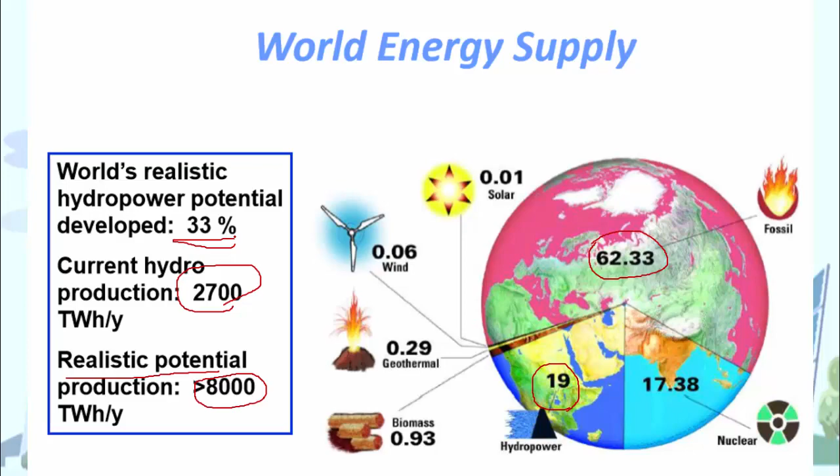Another interesting statistic here is the total realistic power potential production is around more than 8,000 terawatt hours per year. But currently we are producing only 2,700 terawatt hours per year. That is, we are extracting only 33 percent of the total available hydropower. Still 67 percent of the available hydropower is there to explore.

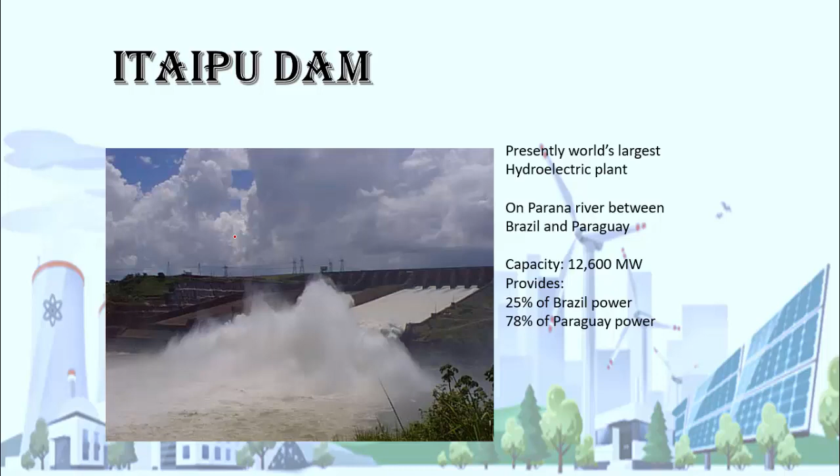So what is hydroelectric power? Water power, basically the water which is stored at high altitude, has potential energy. That potential energy is converted into kinetic energy, that is moving energy. Then that kinetic energy is used to produce mechanical energy. That mechanical energy will be converted into electrical energy. This is how water power is converted into electrical energy: potential energy to kinetic energy to mechanical energy to electrical energy.

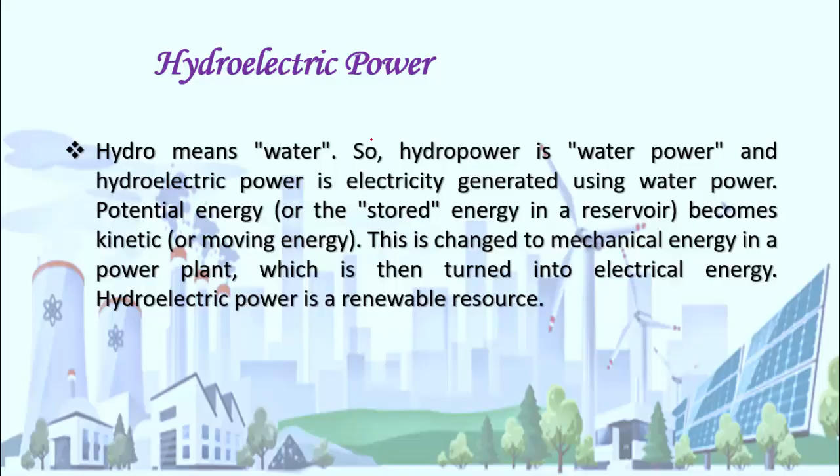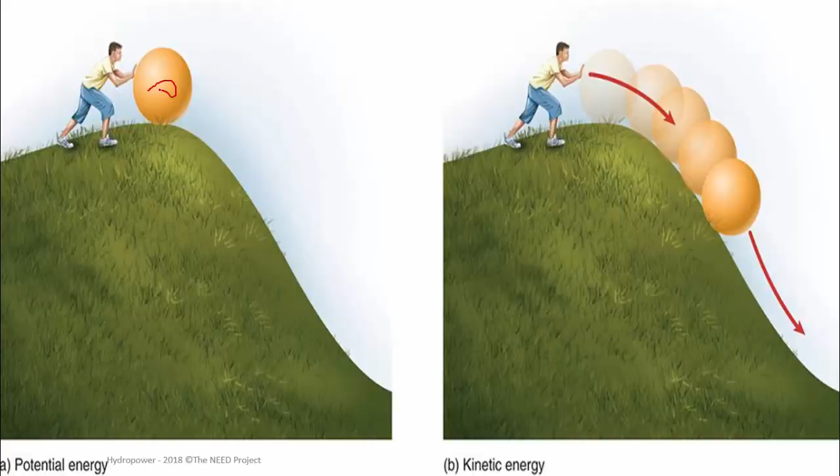When you push a ball from a mountain which has 100 meters of altitude, the kinetic energy, that is the velocity of the ball, will be less than the velocity of the ball pushed from 1,000 meters elevation. That is, the kinetic energy is directly proportional to the potential energy. That potential energy is directly proportional to the height where the mass is stored, that is the head value. If the head value is high, you will get high potential energy and high moving energy, that is kinetic energy, right?

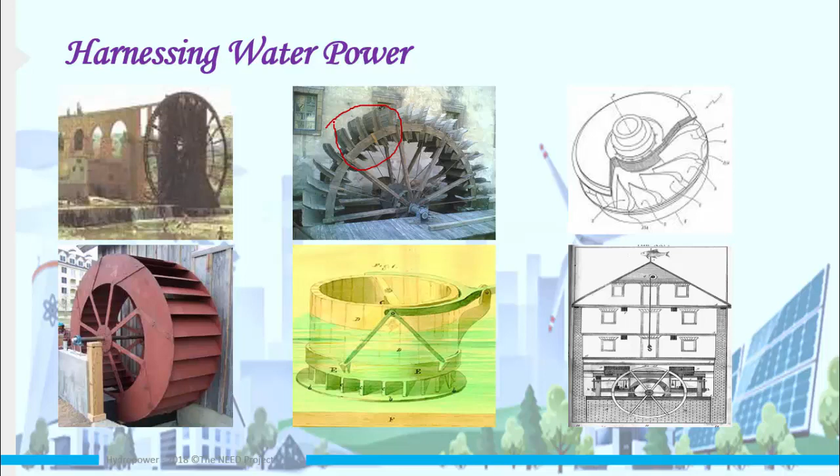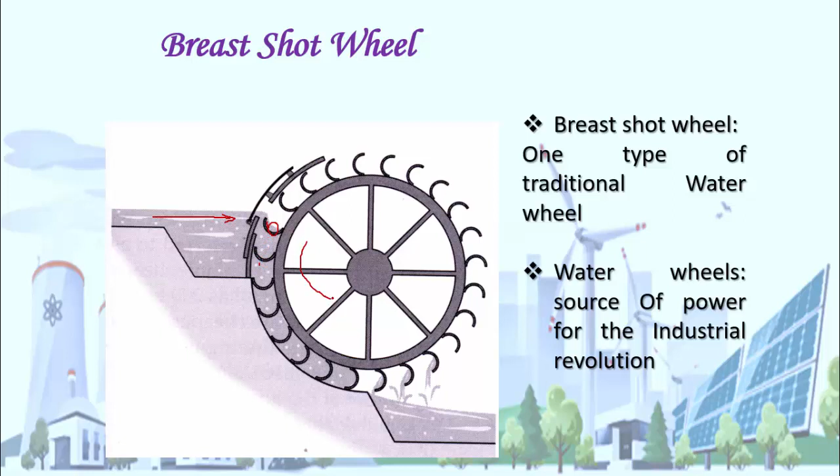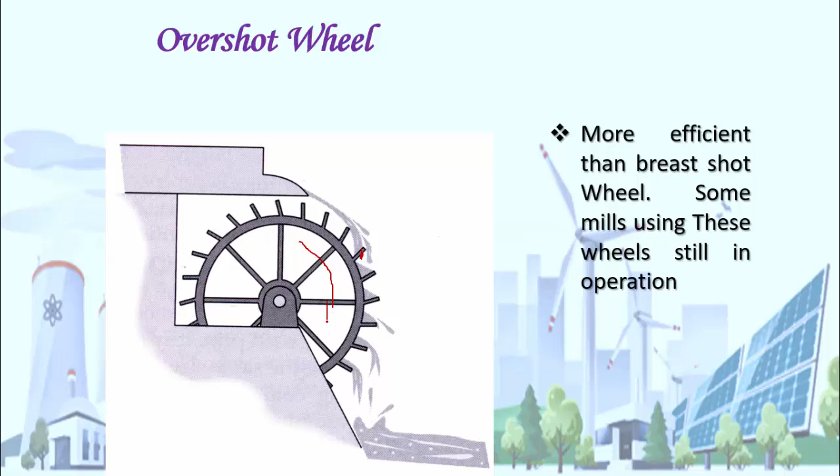This is how water power was harnessed in the early stages. These wheels were used at the start of the industrial age to extract water power. The water flows in this direction, and when the water fills the bucket, because of the weight of the water, the bucket comes down so that the wheel moves around. Here, the water impinges on these blades, that is vanes, and because of the impact energy, the wheel starts to rotate in this direction. This wheel is more efficient than the last one, right?

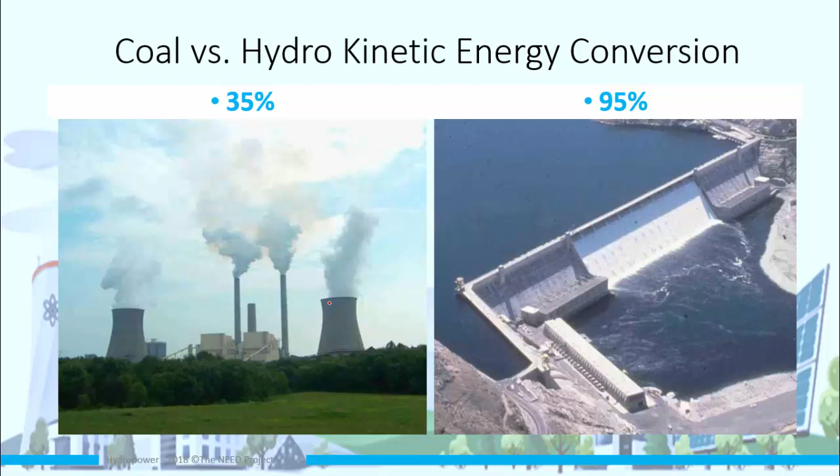In the last video we saw the steam power plant, and I told you that the steam power plant conversion efficiency may be around 25 to 35% only, but in hydraulic energy the conversion efficiency will be about 95%. The head value is the height difference between the water level in the reservoir and the water level entering the turbine. This is your turbine, this is the water level entering the turbine, and this is the water level of the reservoir. So this height difference is the head value.

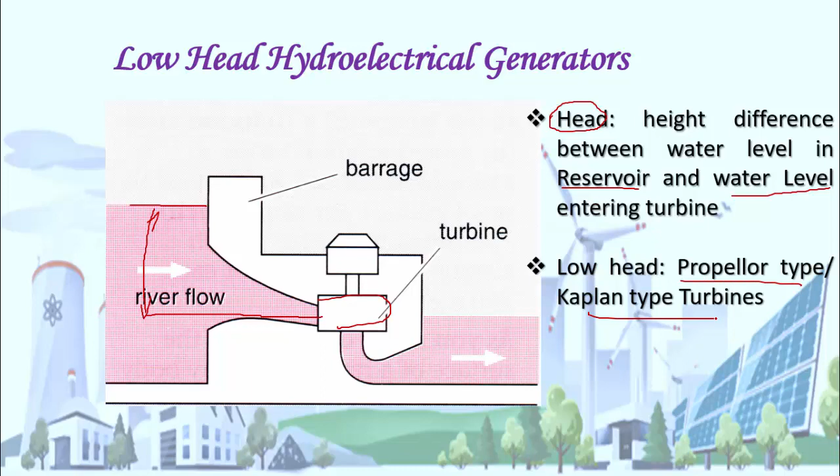When the head value is very low, you use the propeller turbine or Kaplan turbine. These are the propeller turbine blades. These are guide vanes, that is wicket gate guide vanes. Through these guide vanes the water enters the propeller casing and flows like this. Because of the reaction, the blades move in the opposite direction, so that the shaft rotates in this direction.

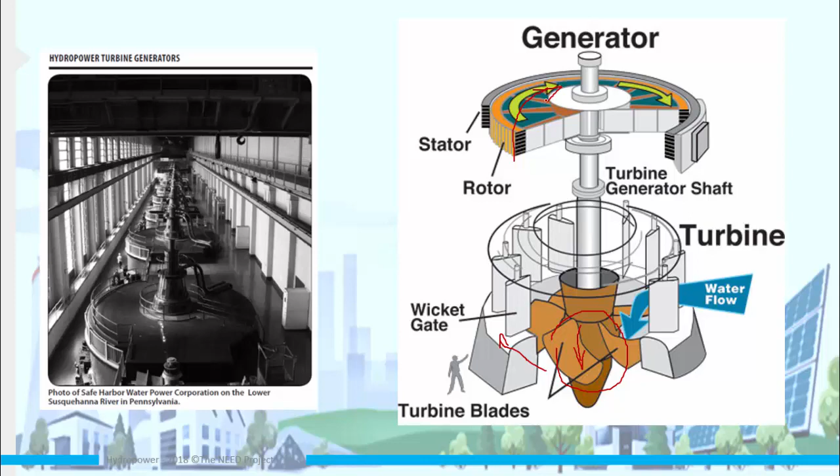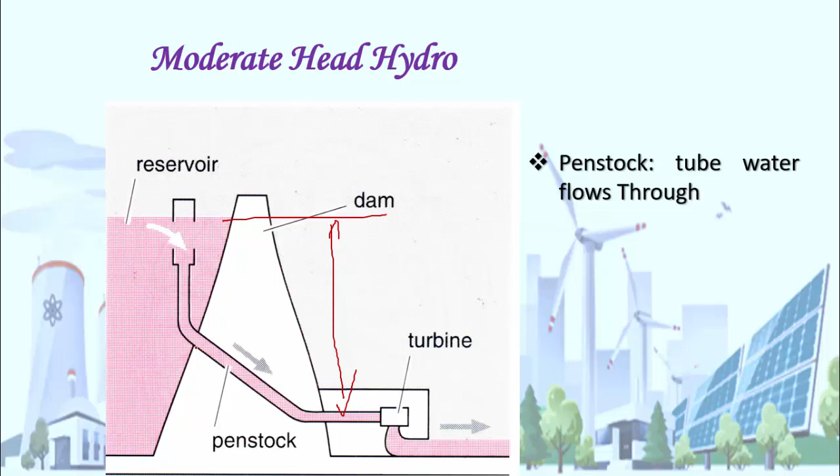This is how the Kaplan or propeller type turbine is working. Here when the head difference is at a moderate level, that is, if it is more than 50 meters and less than 200 meters, you have to use the Francis turbine. Here the pipe which takes the water from the reservoir to the turbine is called the penstock. This shows a typical diagram of a Francis turbine.

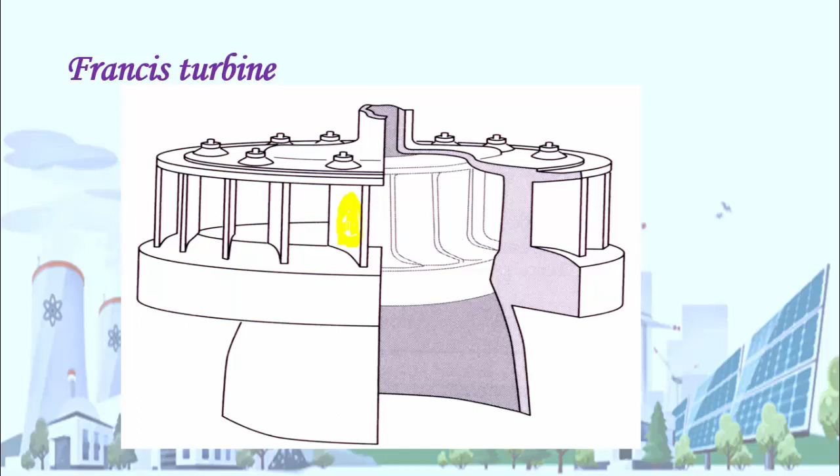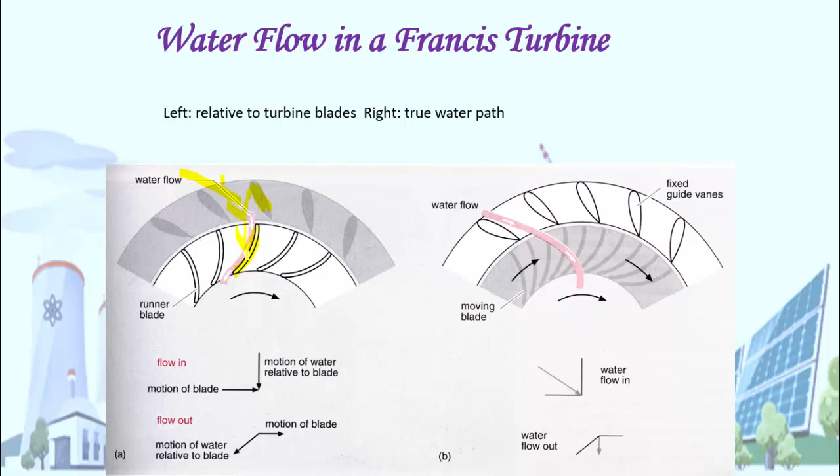These are called guide blades; they guide the water which is entering into the Francis turbine. These are the blades of the Francis turbine, right? Here the water flows in this direction, and these are the guide blades, which I showed in the last slide, and these are the runner blades. If the water enters the guide blades in this direction, it impinges and goes in this direction, so because of the reaction this blade rotates in this direction, right?

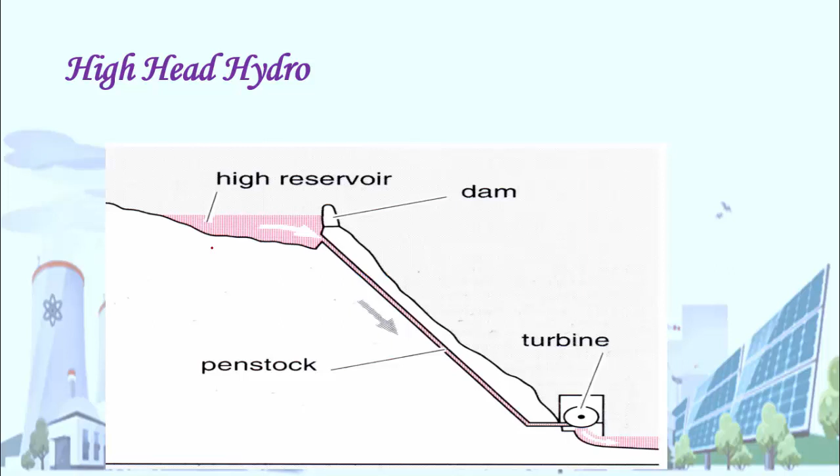The Francis turbine and propeller turbine are called reaction turbines because of the water flowing. As a reaction of the water flowing, the blade starts to rotate. Because of this, the Francis turbine and propeller turbine are called reaction turbines.

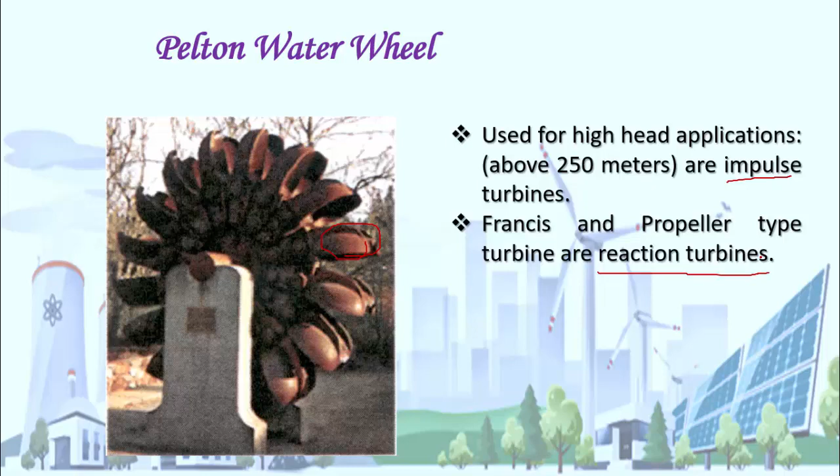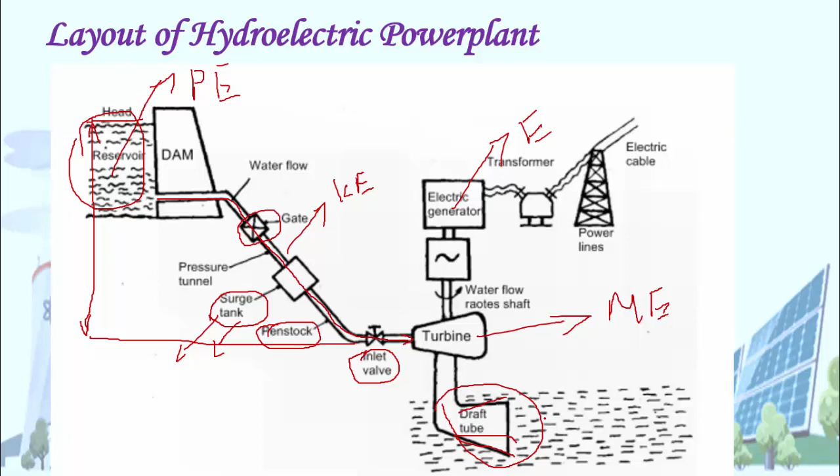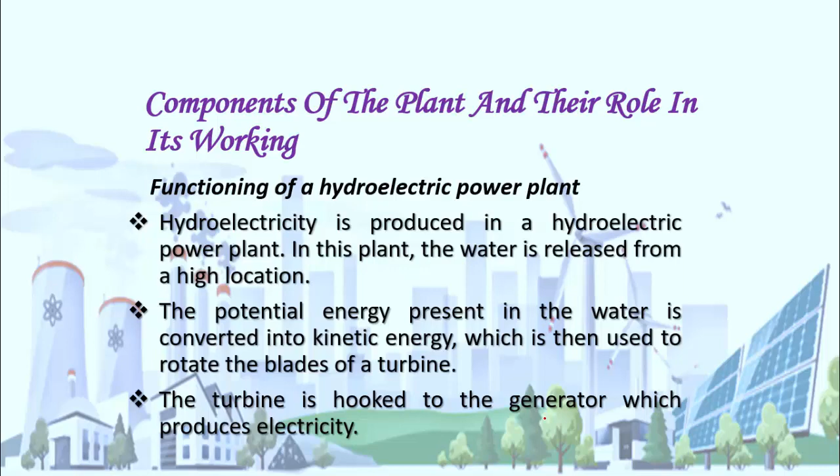This is the basic layout of a hydroelectric power plant, and in the further slides I have explained each and every component of the hydroelectric power plant. Here I gave you the working of the hydroelectric power plant, how, like a story, potential energy is converted into kinetic energy, to mechanical energy, to electricity, right? That is what I gave there.

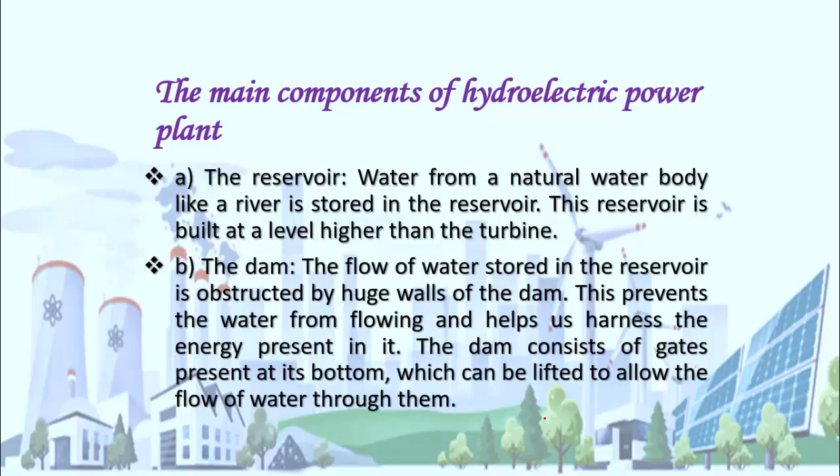These are all the main components of the hydroelectric power plant. First, the reservoir. Water from a natural body like a river, that is the catchment area, is stored in the reservoir. Usually the reservoir is built at a level higher than the turbine. Then the dam. The dam is nothing but the huge walls which obstruct the flow of the river, right? This prevents the water flowing and helps to harness the energy present in the water.

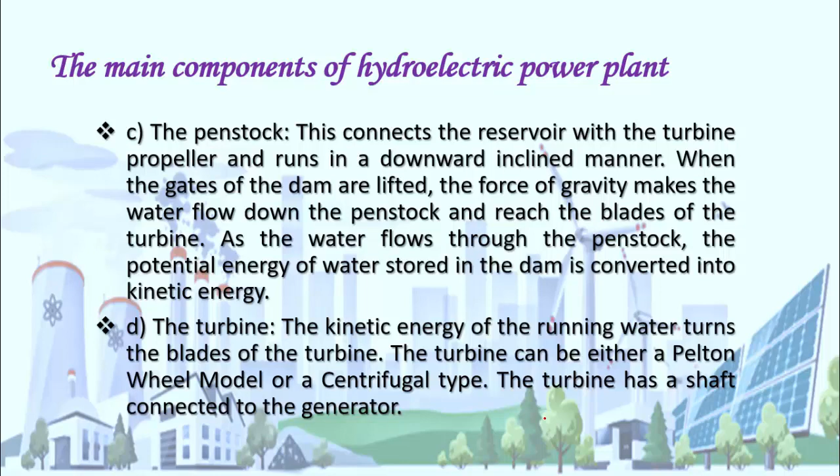And the penstock. The penstock is nothing but the pipe which connects the reservoir and the turbine. Because of gravity, in the penstock the water flows from top to bottom, right? The turbine. The turbine is a device which converts the kinetic energy into mechanical energy. And the generator converts the mechanical energy produced by the turbine to electrical energy. From the generator, the power is transmitted to the power lines.

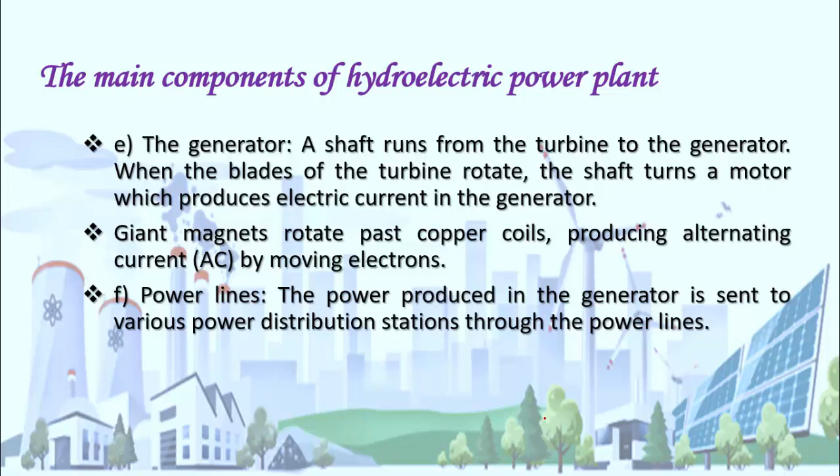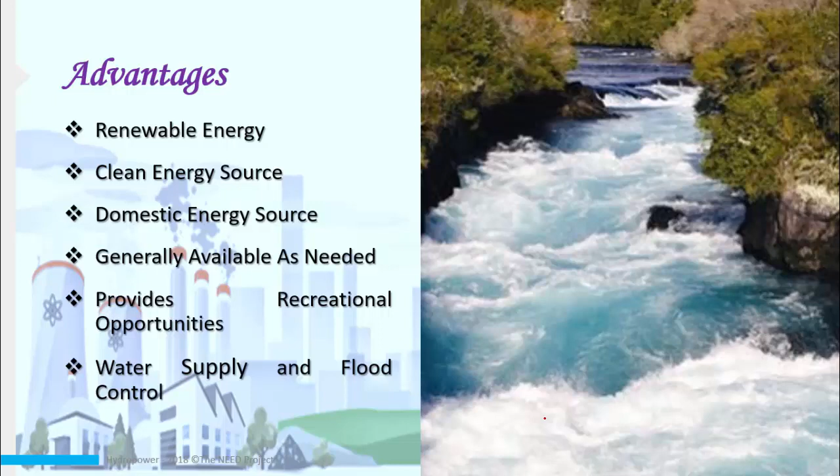I can't tell the disadvantages of a hydroelectric power plant, but I can tell you the environmental impacts created while you develop a hydroelectric power plant. The first thing is fish population. Second, quality and flow of water. Because the dam is a huge structure, the quality and the water flow will be affected, right? Similarly, the ecosystem of the area where the dam is built will be affected. These are all the problems with the dams.

That is, silt builds up and fills the reservoir, fish migration is disrupted, the water temperature in the dam decreases, and water gets more saline because it is stored in a single particular place. Similarly, the oxygen level goes down, and because of that the fish population goes down. Water slows down and diseases increase: if you store water in a particular place, mosquitoes form in that water, and because of that disease increases.

These are some environmental problems with the dams, and in the next video we will see the working and the components of the diesel electric power plant.